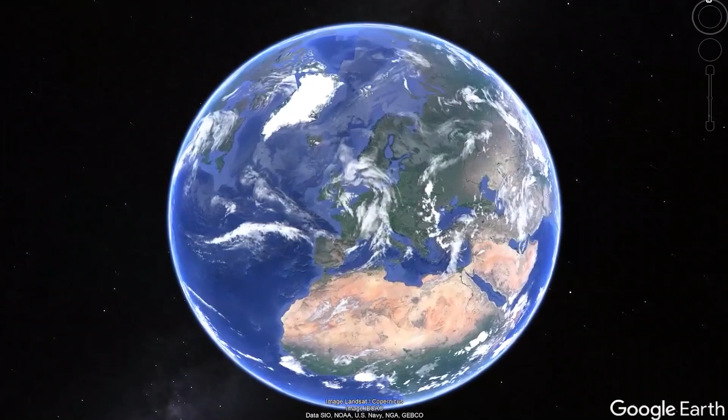The Kent School of Architecture and Planning is based at the Canterbury campus of the University of Kent. Located in the centre of the campus, the school is ideally placed to access the many facilities that the campus has to offer. The school was created in 2005 and is one of the youngest schools of architecture in the UK. Despite this, the school has quickly established itself as a respected school within a strong academic institution, regularly highly rated in league tables. The Complete University Guide for 2020 placed the school 16th for the UK.

Our postgraduate provision has grown over the years, and today we offer 6 master's programmes covering areas such as digital design and visualisation, heritage and conservation, urban design and planning, and sustainability, as well as our PhD programme. These programmes are supported by the wider postgraduate community within the school and university.

The Research Excellence Framework, or REF, recognises the research that the school engages with, rating us joint 8th for research intensity along with the University of Cambridge. The school is home to 3 research centres, each with their own particular focus on architecture.

CREATE is a centre for research in European architecture and is committed to the cultivation of humanistic values and ethical responsibility through the exploration of cultural and social contexts within constantly evolving European and national identities.

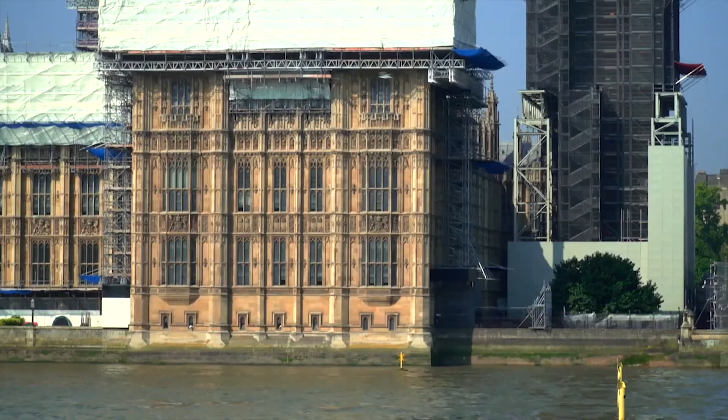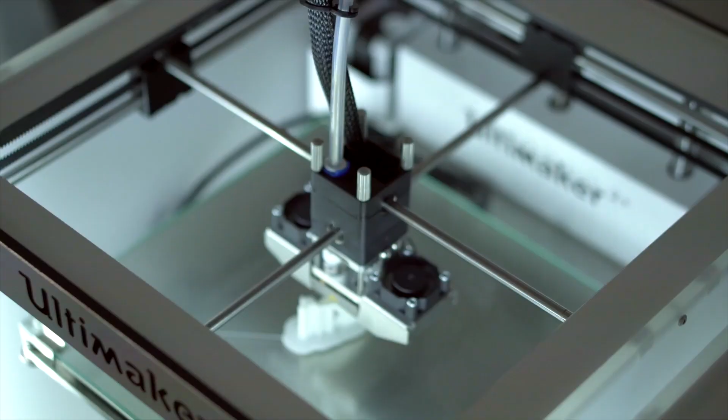Finally, DARC is the Digital Architecture Research Centre, which looks to explore the creative use of digital technologies to enhance design and fabrication possibilities for architecture and the built environment.

The postgraduate community within the school is strong, with regular PhD research seminars, an open lecture series with invited speakers organised by our 3 research centres, and informal postgraduate coffee meetings, all of which enable students to meet other students outside of their classroom group.

Let me now hand over to my fellow programme directors who will tell you a bit more about their courses.

Studying conservation at Kent will provide you with an ideal opportunity to engage with architectural heritage. In the last decades, we have realized that protecting and reusing historic buildings is one of the keys to a sustainable future. Conservation professionals can play a major role in the development of our cities. Today, their expertise is sought by architectural practices and developers, local authorities, and heritage organizations. This is an exciting time to be studying conservation.

Canterbury is one of the best places to engage with this topic. Based here, our students have historic buildings of all eras literally at their doorstep. Our area includes the World Heritage Site of Canterbury Cathedral, and we are surrounded by wonderful historic towns like Rochester, Rye, Chilham, and Margate. Historic buildings in this area range from medieval churches to 19th century oast houses and from Victorian residences to 20th century cinemas.

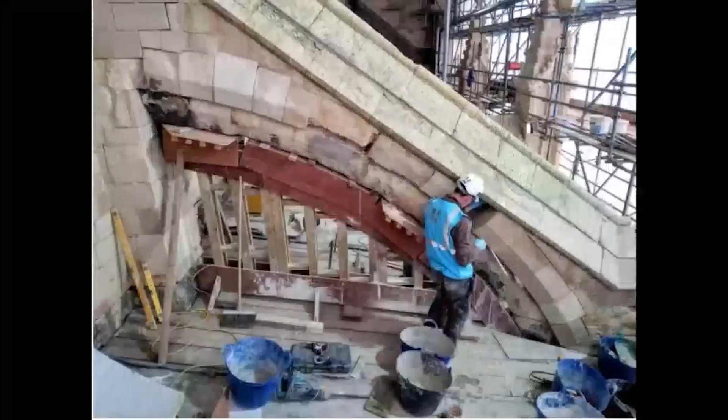Thanks to our partnership with Canterbury Cathedral, our students learn from the conservation of one of the world's most important historic sites. We access restricted parts of the cathedral and learn about its decay and repair with the guidance of the craftsmen and architects working on this monument.

Ours is one of the few programs that give its students the opportunity to design an intervention at a historic site at risk. The Society for the Protection of Ancient Buildings helps us identify and access such sites in ideal conditions. This year, our students are working alongside the Society's experts on the refurbishment of a medieval chapel in Maidstone.

Thus, they acquire technical skills and use this experience to develop their own approach to conservation. So, if you love historic buildings, I would encourage you to submit an application to join our program. Note that our students have many different backgrounds, ranging from management to history and from surveying to architecture. For them, this program is a stepping stone towards an exciting career.

As we're fully recognized by the Institute of Historic Building Conservation, the program prepares you for various professional pathways. Our alumni play a leading role in fields as different as architectural practice, consultancy, and academic research. If you're interested in learning more about our program, do get in touch. A good starting point would be our blog, where our students write about their own experience of the program. We look forward to hearing from you.

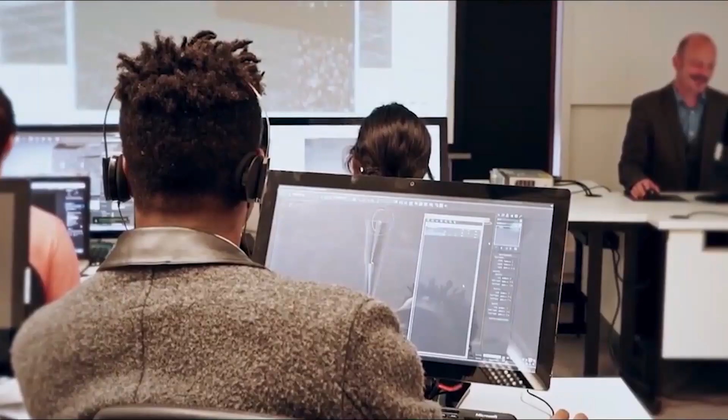Unlike other digital architecture courses, this programme focuses on the visual communication of architecture, exploring techniques such as rendering, photography, film and video, and virtual reality. The programme is taught across two schools, the School of Architecture and Planning and the School of Engineering and Digital Arts, both of which bring their own distinct perspectives and experience to the course.

The course is divided into a number of different modules, each of which focuses on particular aspects of visualization. When you join this course, you'll spend a lot of your time learning the latest industry standard software. In particular, you develop your skills in digital architecture portfolio using Autodesk's 3D Studio Max with Forest Pack and Railclone plugins and Corona and V-Ray renderers. This equips you with the knowledge and experience needed to produce the best work ready for the workplace.

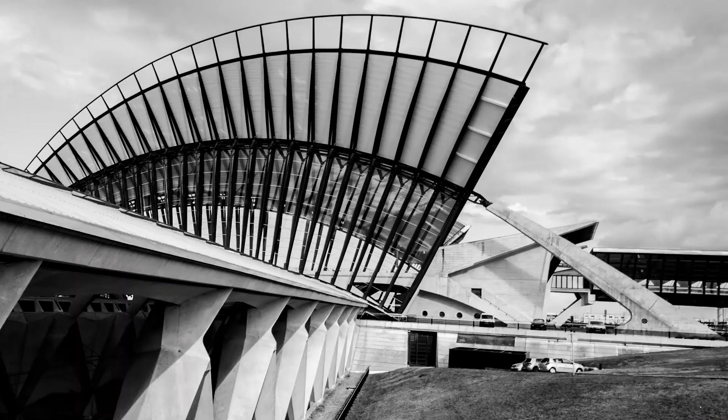In addition to this, you will also learn about architectural photography, using both traditional and digital equipment, and using programs such as Adobe's Photoshop and Lightroom to edit and enhance your work. This photographic work underpins your digital skills as you learn about composition, lighting, and exposure control. You will also develop your understanding about the relationship between film and architecture through both research and observation, helping you to contextualize your own visualization work.

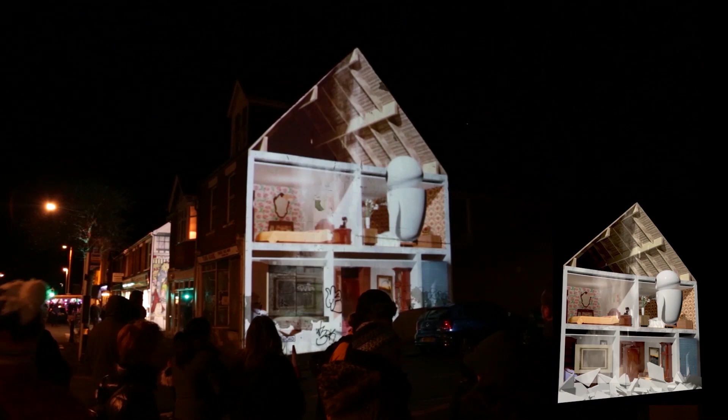In the module Virtual Cities, you learn about both augmented and virtual realities and the important role they have in architectural visualization. Initially looking at projection mapping in public spaces, you use digital technologies to augment and perhaps enhance the built environment around us. Later in the year, you move from augmented to virtual reality using VR headsets to recreate and experience digital worlds in heritage scenarios.

In the School of Engineering and Digital Arts, you will also learn about film and video and digital compositing, using Nuke to composite your digital footage with live action video.

In the summer, students can opt to realise their dissertations in one of three ways: first, as a written dissertation, second, as a project, and thirdly, as a work placement in industry. The work placement option sees students working at companies such as Miller Hare, AVR London, Glass Canvas, Hayes Davidson, and other leading firms in visualization.

The work placements provide valuable experience for the students, many of whom continue to work for the companies after their graduation. You can find out more about our programme on our website, on our social media channels, or by emailing us at Kent School of Architecture and Planning.

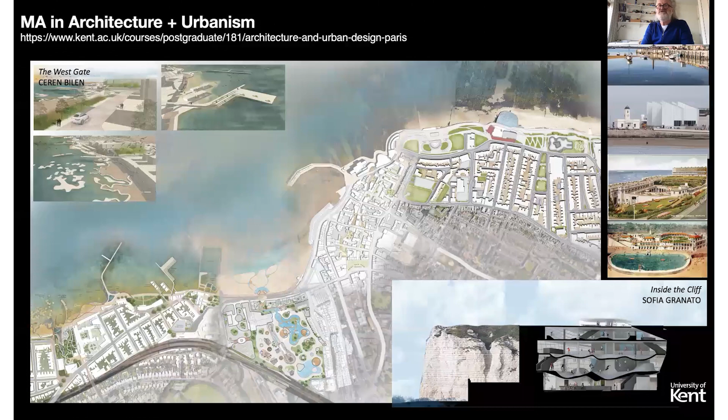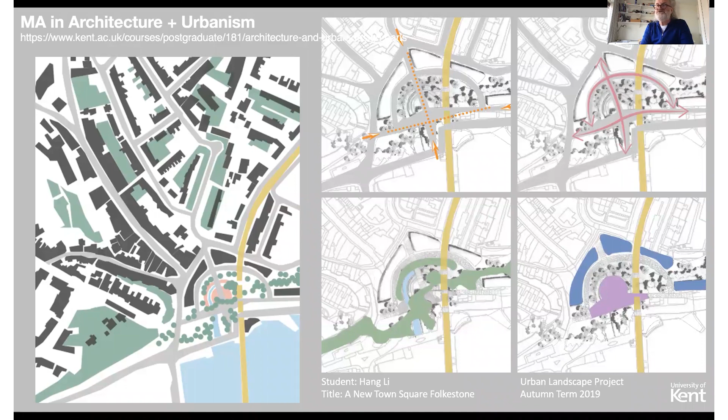In this first planning study, students are asked to master plan a new, socially and economically mixed urban neighbourhood. We look at how to reduce the need for travel and to reduce pollution and stress in the process, and to improve the overall quality of urban life. These have been some of the examples of recent work by our students.

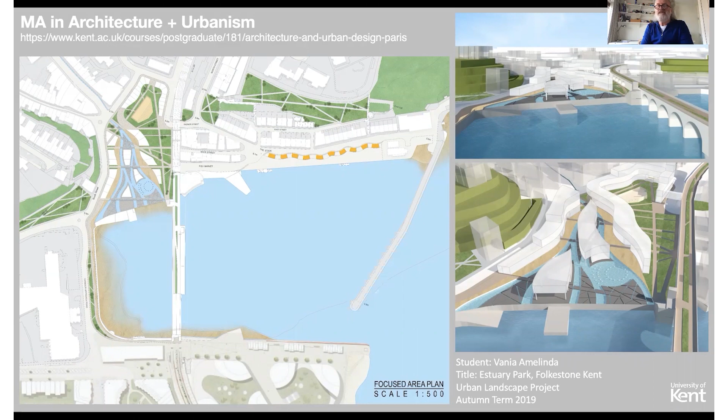In the spring term, students relocate to Paris, where studies continue at our School of Arts and Culture in Montparnasse, one of the most inspirational cities in the world. There we continue the programme of lectures into the theory and history of urban design. This lecture module explores the idea of the city and how urban concepts have evolved throughout time to increase our understanding of cities and how they can be made good places to live whilst avoiding further damage to the planet.

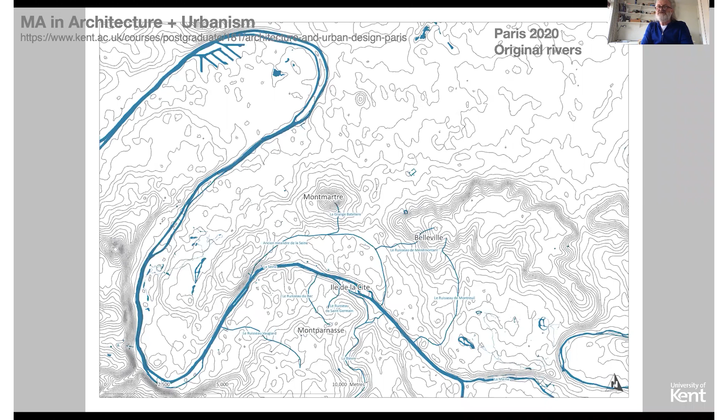Students study how Paris evolved from its natural landscape context in order to understand the shapes and patterns of this great city.

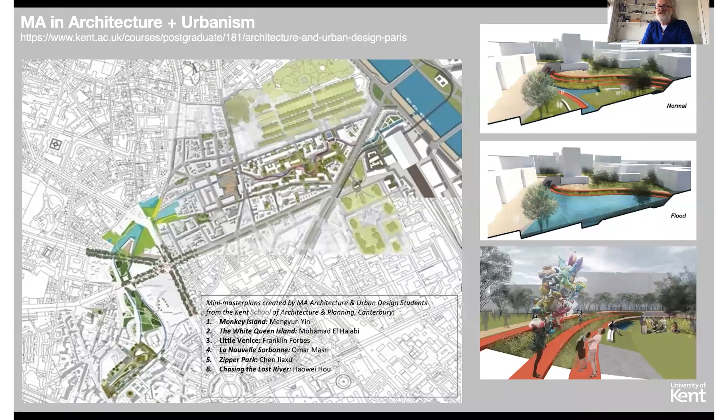You'll then create a master plan that explores how landscape can transform the city to provide clean water, clean air, a haven for wildlife, relief from flooding to help deal with the climate crisis, and to help our physical and mental health. Recent studies that students have undertaken have been published in books and magazines.

The programme culminates in the dissertation module of the summer term, in which students concentrate on their own research into the various aspects of urban design that we've studied throughout the year, whether theoretical, historical, or design-based.

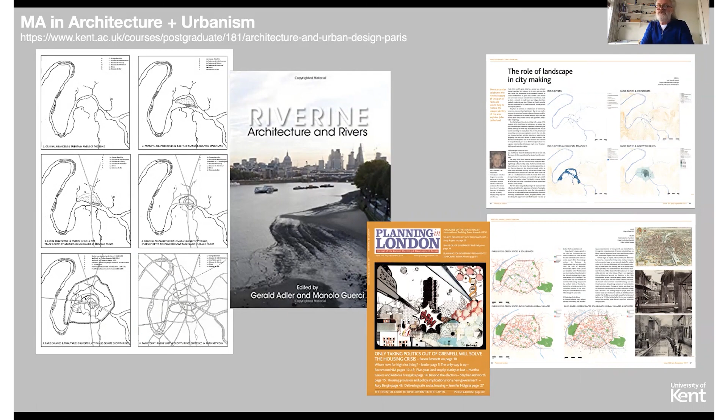The crises currently faced by the world pose some serious challenges to our future cities, and it's imperative that we rebalance. The role of today's architects and urbanists in proactive city planning is therefore more important than ever.

The MSc Bio Digital Architecture programme takes a research-oriented approach to study, building on students' computational skills in architecture to make conceptual prototypes, and is where the future of architecture lies.

Many architectural practices now have modelling teams that specialise in digital tools to solve problems and generate ideas. And digital software companies are developing software and integrating plugins into their programmes to optimise design and enable architects and designers to generate ideas and solve problems.

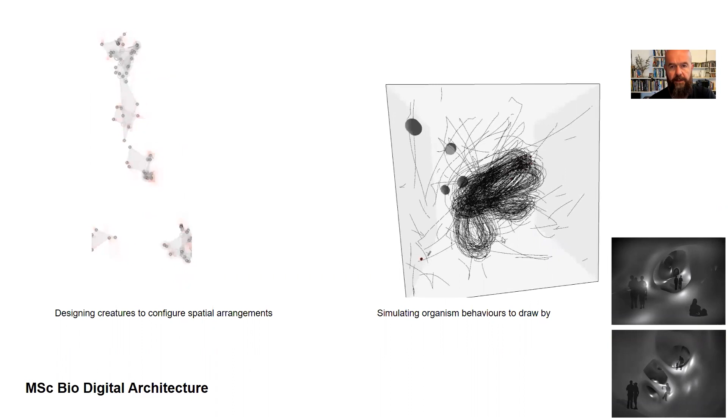So not only is the future digital, but the way we design and think is increasingly defined by the capacity of digital tools to expand our thinking and design capacities.

This is happening because computers enable us to explore decentralized and distributed approaches to problem solving and to generate shape and form emergently. The approach stems from what we see in nature, whereby many things do things at once, seemingly towards a common goal, such as ants searching for food, termites building a nest, the branches of a tree growing, animals that herd moving as one, fish schooling, and so on.

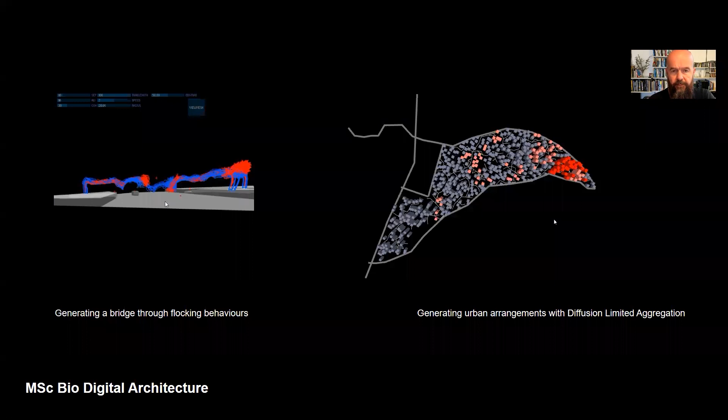Nature is a creative engine, generating shape and form and solving problems in a way that we can simulate in computers, i.e., we can use computers to think in a parallel manner.

Biology explores how the natural world works to describe how organisms and plants develop, form, and grow. And in recent decades, computer science has built algorithms with which to simulate the generation of patterns, shapes, form, and the behaviors of natural phenomena to explain and understand them.

And in turn, these algorithms have been bent towards problem solving to resolve human issues. Such methods provide a means to unravel complex problems, using a computer to solve something more economically or to uncover novel solutions manual methods can overlook.

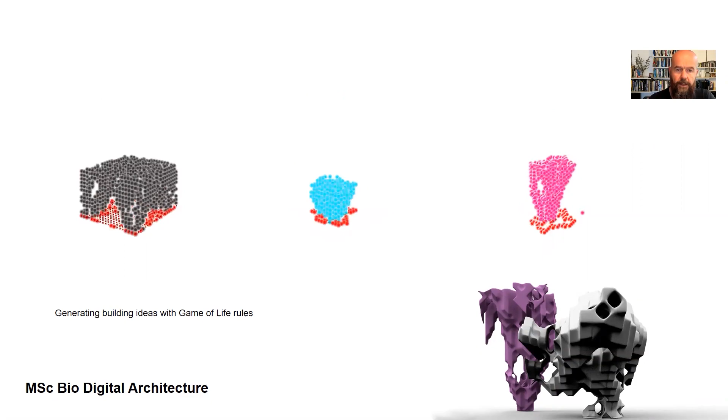So the MSc programme builds on this practice and the trends of contemporary science to enhance how designers and architects think and thereby practice architecture.

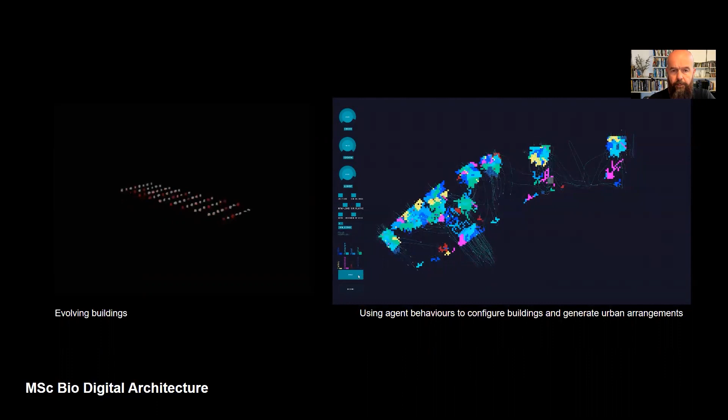Students will be introduced to novel concepts of biology and computer science to understand how these work and apply to architecture, to think about behaviour and the generation of shape, form, and thereby the configuration of space, to understand how these may arise as a product of the consequence of interactions and performance of entities in a system, to think about how architectural ideas and solutions might emerge and to apply this way of thinking and working to generate architectural solutions.

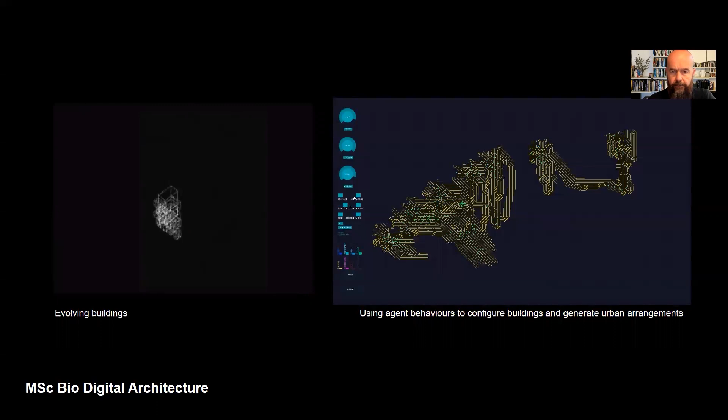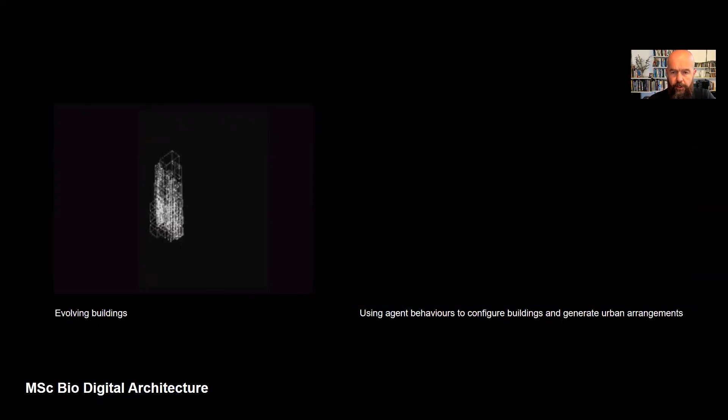We work at the conceptual level. We care about the creativity of processes and the development and adaptation of methods to explore the creative use of computation for architectural design. Students will be taught how to work with digital tools parametrically, but will also be taught

how to work with computers at the level of code so that they can adapt algorithms and digital tools to make them their own. The aim is that students will gain an in-depth understanding of biological concepts and computational methods and apply them to conceptual architectural design in new ways, to redefine how we think about space and the generation of architectural form, to invent and define the future of architectural design.

Hi everyone, so I'm here to speak to you today about our Master of Arts in Planning and Resilience at the Kent School of Architecture and Planning.

The course is effectively what it says in the title. So we do town planning, but we also, in response to the global challenges that we now have, like the current pandemic, with which we all have to live on a daily basis, we also cover resilience.

And by resilience, we mean the ability to bounce back better than we were before, i.e. how is our level of preparedness? What are we doing to be better prepared the next time something like this happens, so that when it happens, we are better able to respond.

And in a way, that in a nutshell is what the course is about. We cover a lot of the challenges that sit side by side with the pandemic, some of which have been brought to public attention as a result of what's been going on. As more people spend time at home, it's become apparent to people in the building, planning, and architecture industry that people need space, and that space can only be provided if we look at the way we design our buildings and spaces, and what facilities we offer, so that when people are in lockdown they have access to green space, office space to do business, and so on. These are some of the things we cover this year, but we were doing it even before the crisis.